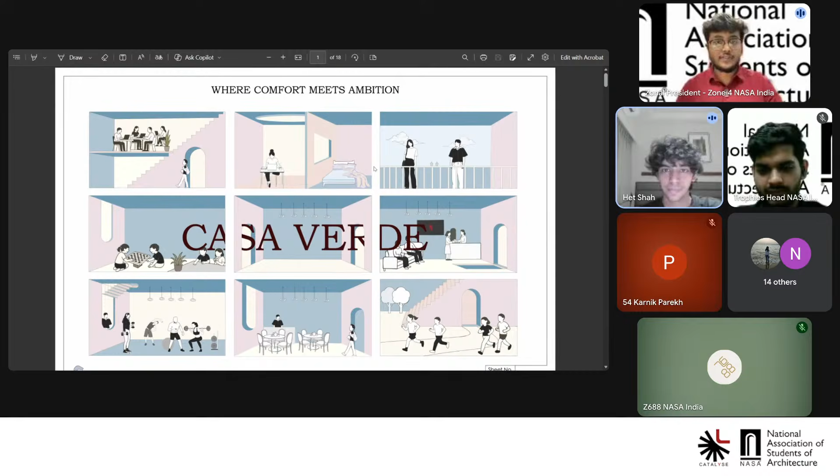Is the screen visible? Yes, the screen is visible. So as Shrestha rightly said, the last brief majorly talked about reimagining urban rental housing, for the evolving lifestyle and the urban migration which has been at its peak.

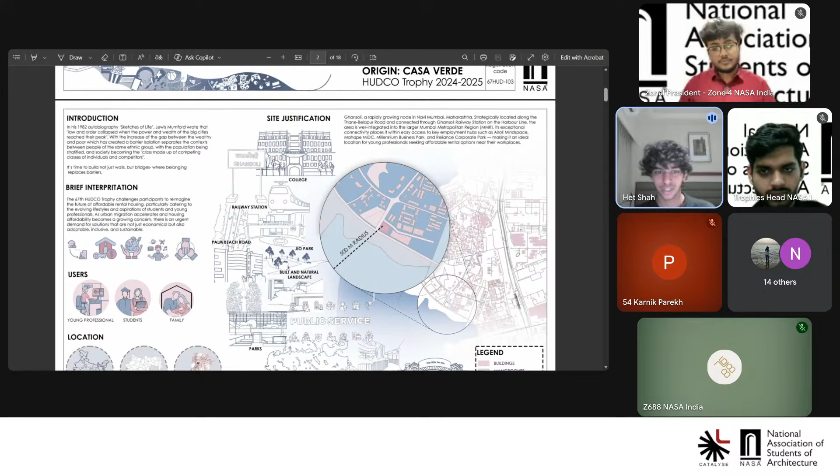Our main focus was on the users, which were the young professionals, the students, and the family members that come with either the students or the young professionals. So our main objective was to identify the site. Our site was at Ghansoli, which was selected because it was near the college, in close proximity to the Jio Park and all the industrial areas, which majorly help with the migration of young professionals or students.

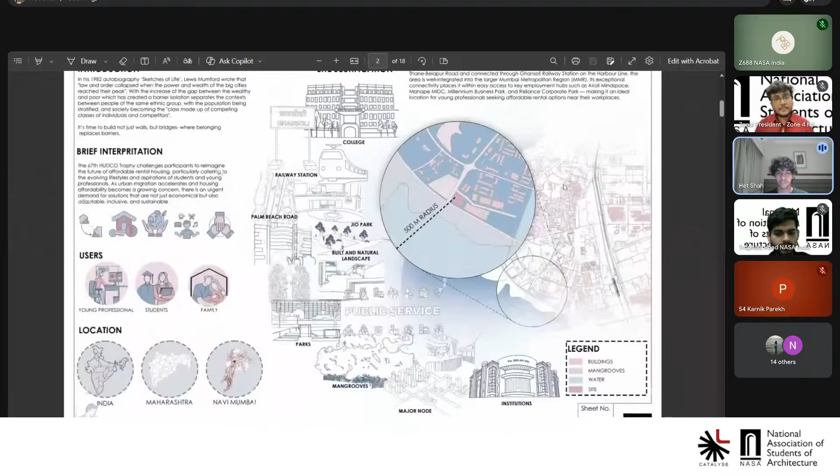After selecting the site, we moved to the SWOT analysis. The work was divided, where a few people were given the task of understanding the government schemes available in the Navi Mumbai region or surrounding areas, which could help reduce cost or assist in rental housing. We also tried to understand the site during different periods of the day - morning, afternoon, and night - and what activities take place there.

After that, we started studying rents in the Navi Mumbai metropolitan region. We identified that rent has ranged from around 19,000 to 20,000 down to 7,000 to 9,000. In Ghansoli specifically, we identified the rent prices for one room kitchen, 1BHK, 2BHK, and dormitory units - the modules asked for in the brief. We differentiated between unfurnished and furnished options, and identified that rent prices have been increasing over the years, but there has not been a drastic change in the salaries of people working in those regions.

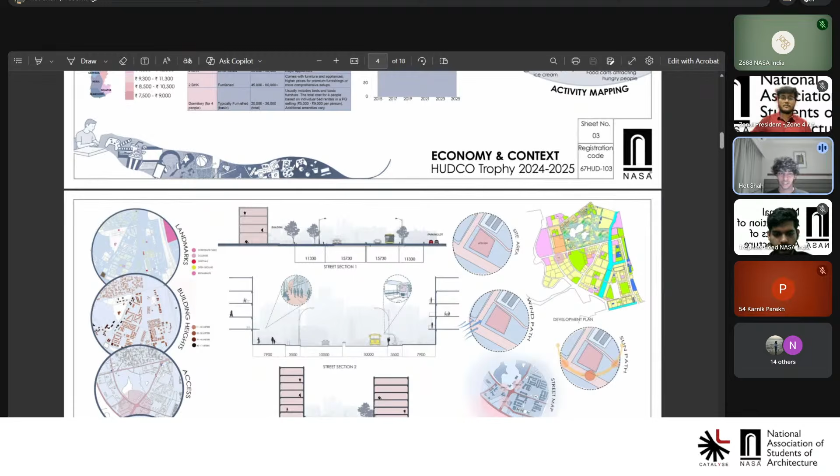After that, we tried to understand the site at a micro and macro level - the land masses, surrounding green spaces, street level, how the buildings, footpaths, and roads work together. We also studied the site area, wind path, and sun path, which helped us in the overall massing and site development of our built mass.

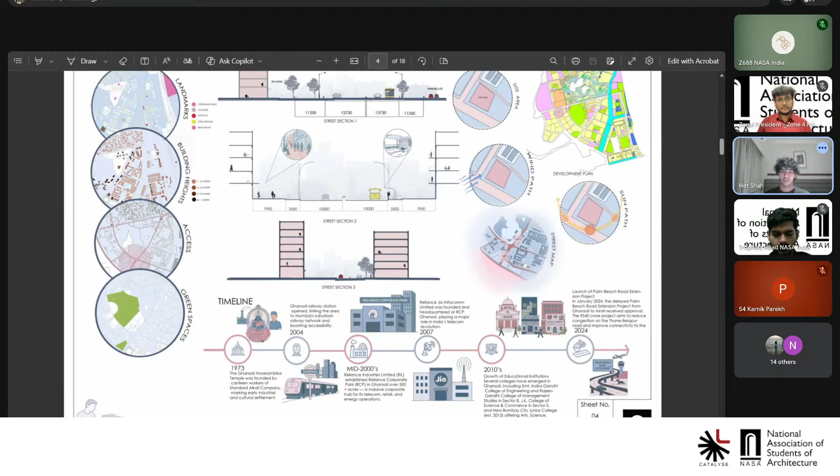We tried to study the timeline of the region, how it developed over the years, right from 1973, when the Navi Mumbai plan was proposed, and after that how the Jio Park helped in evolving the whole region.

After that, we moved to interviews, where we interviewed different stakeholders in the region, from low salary workers to medium and high salary workers, understanding how they have been staying and in what kind of conditions. We also interviewed a few students and landlords who have been providing such rental housing in the region.

Then we jotted down what all their needs were, and what accessibility criteria they look for while looking for rental housing in the region.

After that, we came to the case studies, where we identified a few case studies linked directly to our objective, identifying what materials or planning objectives were taken up by the built mass, what was their unit planning criteria, and what was their overall site context based on.

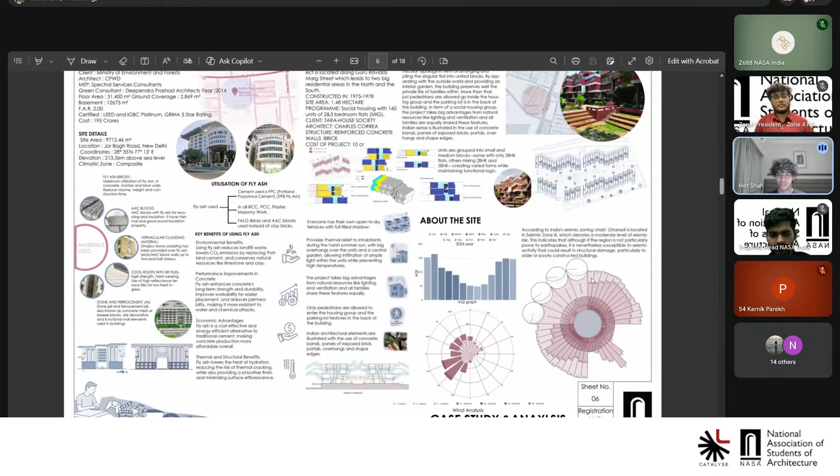After that, we did site analysis using AQI graph, wind analysis, humidity, sun path, etc. This was our main sheet, where we talked about how the building developed over stages.

First was the set out, where the building setbacks had taken place, then the massing, and then our main objectives, which were the passive strategies, including the central courtyard that creates a microclimate.

Then there's the west facade which would require sun blockers. There were double-heighted lounge spaces provided, and open terrace spaces at each floor so that there is a breathable space for the people and it doesn't feel too obstructed.

It was also about how the whole ground floor has taken place, because that's the entry level view that people first see. So there were a few activities provided on the ground floor, which will be explained further.

After that, we also tried to optimize the overall courtyard by keeping the proportions of the courtyard and the building height in proportion, so that the area is shaded throughout the day.

Then we used Grasshopper plugins to understand how sunlight has been affecting the building in different ways, and where there will be a requirement of special treatment.

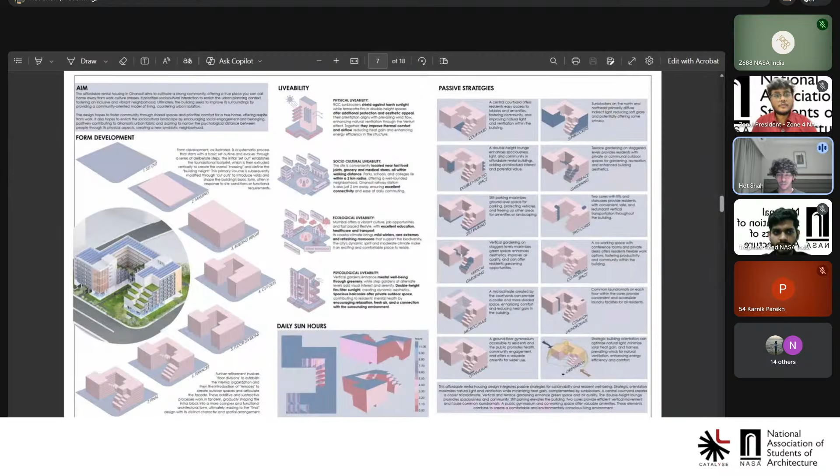Then we identified a few livability criteria such as physical livability, social-cultural livability, and economical livability, thus providing green walls, lawn spaces, or spill-out spaces for the residents so that the overall space can feel much more lively.

After that, I think Shravani, would you like to take off from this? Yes. In the brief, we were asked to design four types of modules: 1 RK, 1 BHK, 2 BHK, and dormitory.

First, we studied the problems faced by people currently living in these spaces. Then, we designed each module in two ways: one for families or couples, and the other for young professionals or students, as the brief included different types of stakeholders.

For the 1 RK, the main problems were less space and storage issues. As shown in plan A, designed for families, we added a partition in the room so one person can work at night while the other sleeps peacefully. We also provided vertical storage like shelves and organizers, along with under-bed storage.

In the same way, we designed the 1 BHK, 2 BHK, and dormitory modules based on the needs and problems of the users. Next sheet.

As you can see in all the plans, we have provided an open kitchen because students and young professionals usually don't use the kitchen very frequently. Instead of giving a separate kitchen and utility area, we used that space to make the bedroom and living room area more spacious. Also, in the plans designed for young professionals and students, we provided two separate toilets since two different students will be living in the unit.

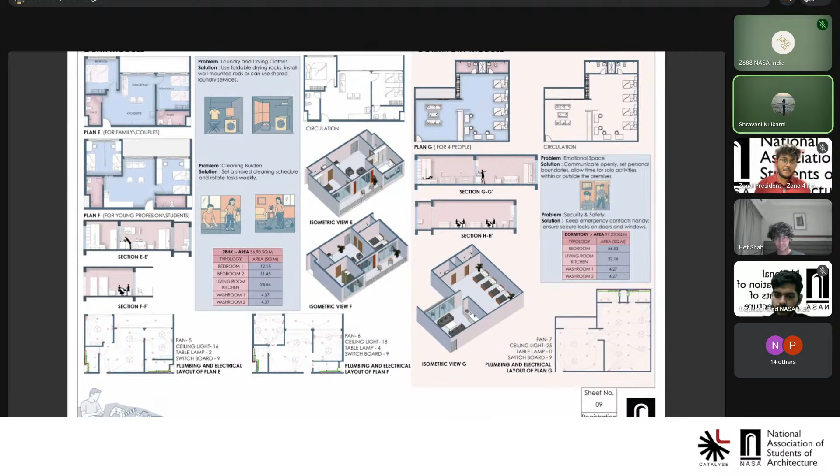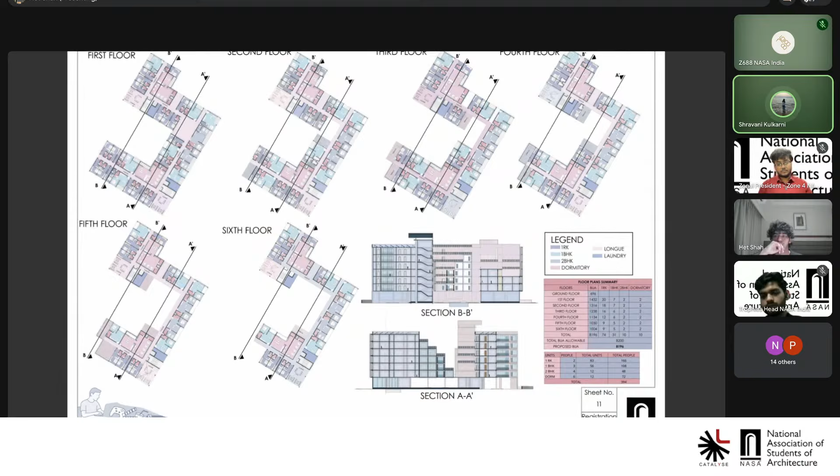In the floor plans, we have provided a lounge space near the lobby and a laundry room on each floor for the convenience of residents. We have also designed a double-loaded corridor to avoid wasting space in circulation areas. As we move to upper floors, the number of units gradually reduces to create open terraces on each level. We have also provided solar panels on the terrace floors.

Next sheet. And these are the views of the building.

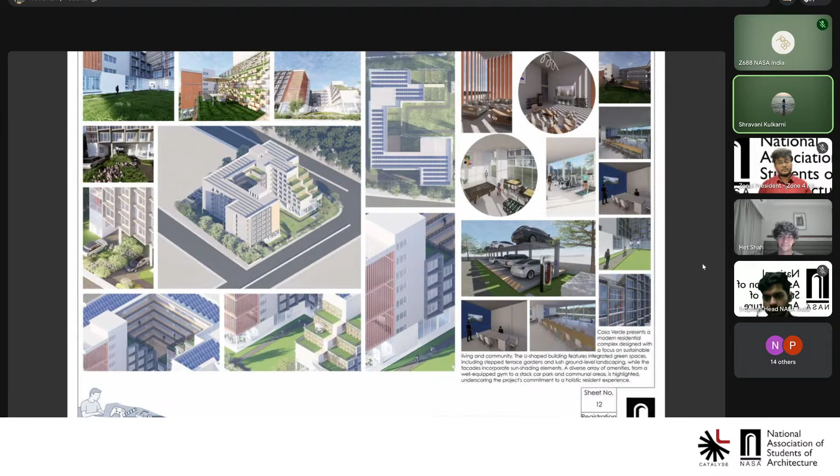Now Het can take over.

So as I rightly said, there were a few areas which were getting harsh sunlight due to them facing towards the south. So we have tried using sun blockers, which are also angled at a certain degree so that there is no obstruction of the view, and the sun is also not that harsh.

Again, we have tried putting some terracotta wall or green wall at spaces to reduce the overall temperature of the building. And yeah...

After that, this is the overall material selection and how we have used low VOC paints or materials which are low cost but also help in reducing the U value of the building.

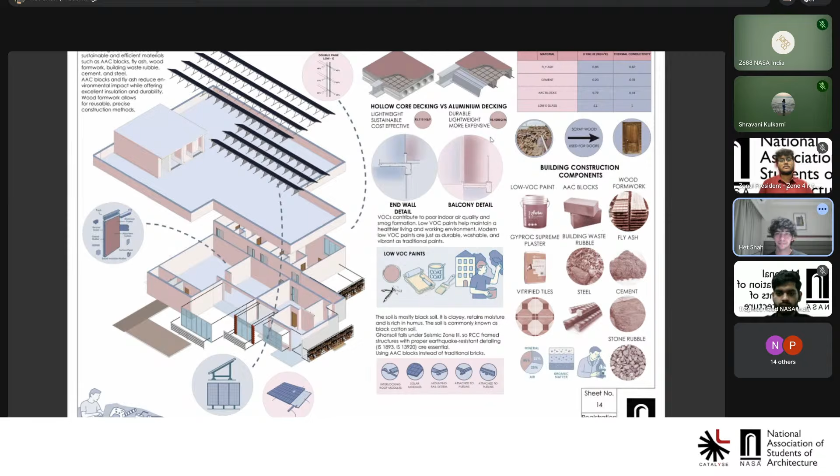Also, we have given a comparison of why we have taken certain methods of construction. For example, the hollow core decking versus the aluminum decking, where we have also shown how much the cost reduction is, and how it is beneficial.

Yeah, and then we tried to get a step closer with building management systems, where we have provided sprinklers and safety CCTV cameras, and how all of them have been integrated into a single system which can be monitored easily.

With that, fire safety has been taken into place with sprinklers at individual distances and smoke detectors, with fire safety norms where the staircase should be at a 30 meter interval.

And then we have also tried providing low flow fixtures and energy efficient appliances, which also help in reducing the overall water consumption, along with the energy use, thus bringing the maintenance cost down.

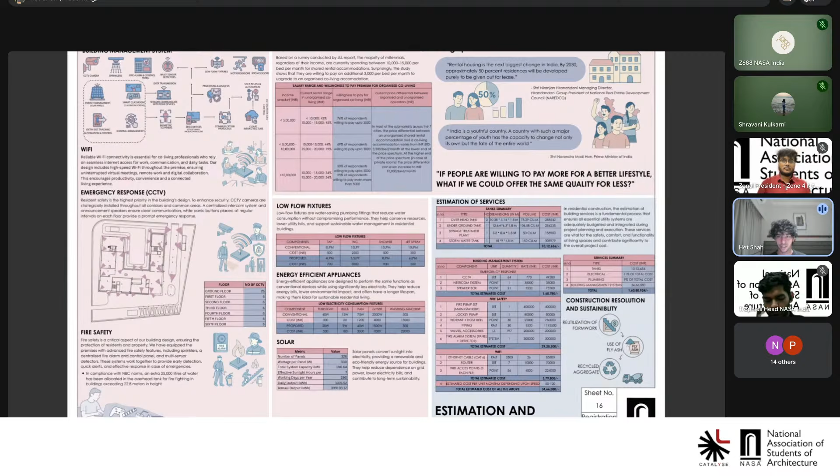And then it was all the estimation of how we have tried to reduce the cost as much as possible, which has been briefly put over here, the overall costing.

And then the final cost that we came to was 7 crore 54 lakhs, 41,222, which was 30 or 35% lesser than the usual cost that was found.

And then we also tried to identify the rent prices that we can provide for the users, which was around 5,000, 12,000, 17,000, in contrast to the existing costs, which were 9,000, 17,000, 25,000, which we identified was again 30% lesser than the cost provided in other buildings.

According to the brief, the design should be sustainable, community inclusive, include innovative technological integration and shared interactive spaces, and be climate responsive. We had to select our site in a tier 1 city, so we chose Kothrud, Pune. It's basically a student area, including IT sector and educational institutes, so we could cater to a large target audience of young youth and students.

We also did the activity mapping and studied about the government schemes. Next sheet.

So this is the site analysis of Pune Kothrud. We did the climate analysis as well, and about the site vicinity, it was near educational institutes. This was the soil analysis and climate analysis. Next.

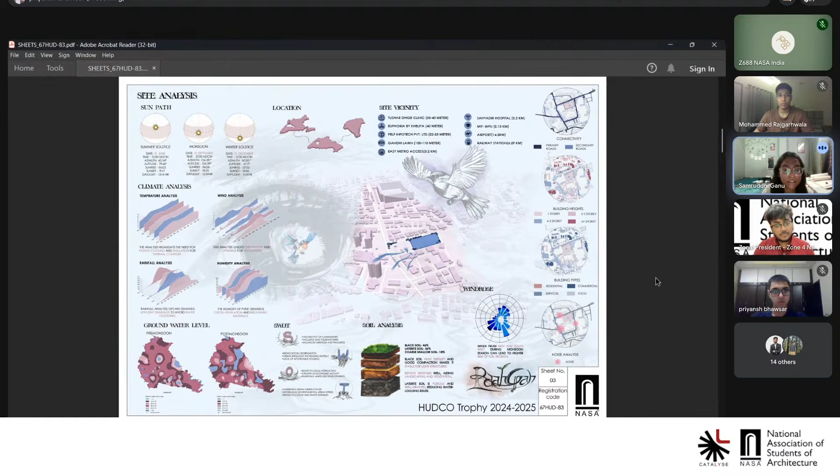We also studied the bylaws interpretation and the massing development. We were given four different typologies: dormitories, 2BHK, 1BHK, and 1RK. So we divided the spaces accordingly.

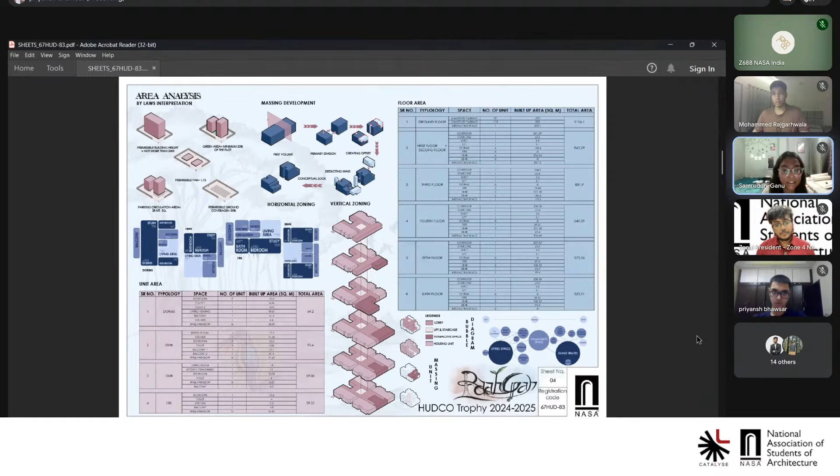And the next is the concept. For the concept, we had a storyline on migrating birds - local migrating birds which were blue robin, kingfisher, and flamingos, and also a local bird. We took them together and showed how migrating birds come and meet up at a banyan tree. The banyan tree shows the place where they rest, which is also our structure, the building that we built. In the concept, we showed how home is not just something you live in permanently - it could be a temporary place where you meet people, grow as a person, and evolve.

Here we also showed how the bird, the blue robin, evolved from an introvert to a bird who could finally bring together everything he had and open up and share it with everyone, and how he could connect and seek opportunities. Also, we studied the sustainable development goals, which helped us know about the requirements and how the government wants things to be done.

Our goal was to construct a low cost maintenance place where students with rental housing needs could afford it, and how everything was affordable to them, how they could live easily. Our design intent was to create everything sustainable.

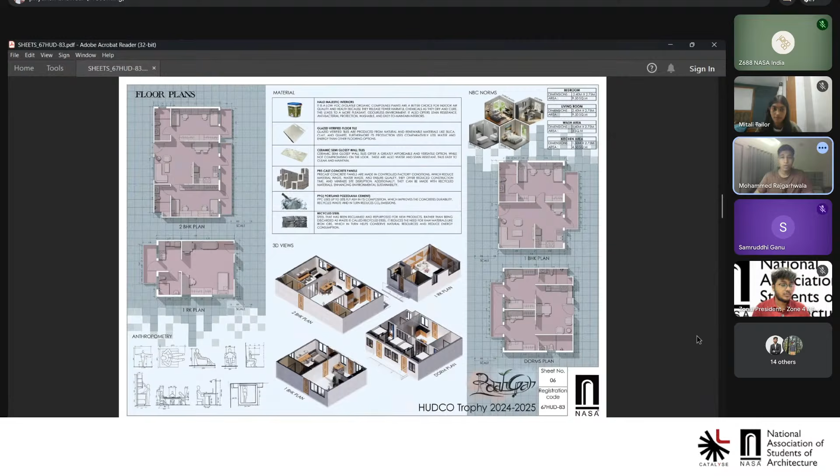Can you go to the next floor plans? So what we did was put one RK beside a 2 BHK, one dormitory next to a 1 BHK, so there could be inclusivity. Someone who has just graduated in a particular field and is senior to someone else could help them out to create inclusivity. If a dormitory is next to a 2 BHK, working professionals in their late 20s could help someone in their early 20s figure things out, even in projects, and they could have real life interaction and experience rather than being isolated. It should be very interactive, and for that we added multiple interaction spaces on each floor, from sports courts like turfs and basketball courts to just spaces to hang out, so you could have inclusivity and community. It was like a banyan tree with a nest of many birds living in harmony, so it was meant to create this harmony.

Can you move to the next slide? These were the renders of each dwelling and all the interaction spaces.

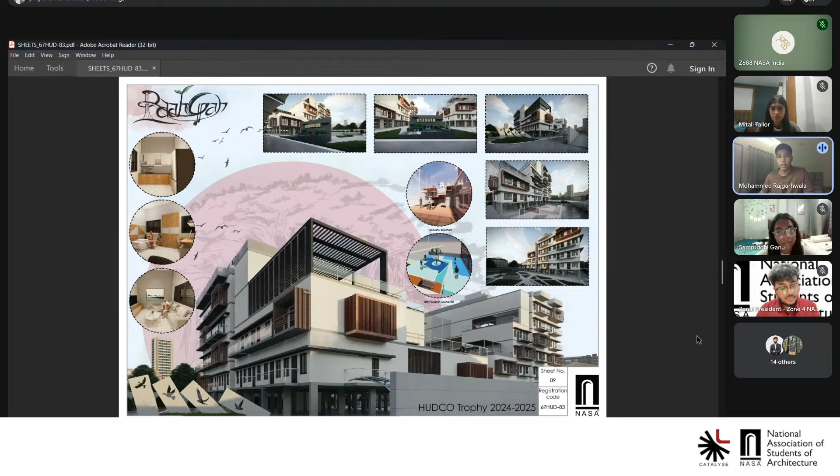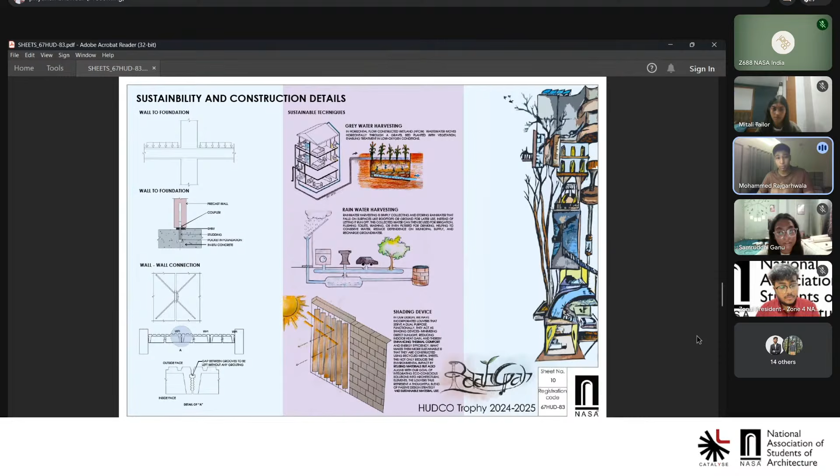These were some sustainability techniques: grey water harvesting, rainwater recharging, and louvers and sunshades were provided to break the harsh Pune sun. Can you move to the next slide?

So this was the life cycle analysis of how sustainable this building was. We tried to use materials that were quite sustainable, and instead of brickwork, we went for precast concrete sheets for the walls, because at one point in their life cycle these were more sustainable than bricks, which were burnt in kilns. It was quicker and easier to assemble than traditional bricks, reducing the time of the project and helping with the cost.

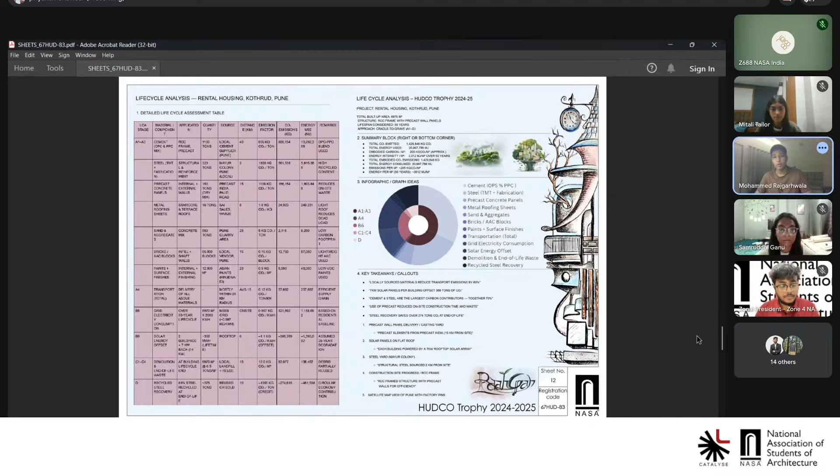Can you move to the next slide? So the conclusion was similar: we wanted inclusivity for everyone. We did not want someone moving from a small town to a tier one city for college to feel it's a big step, to feel alone, not knowing anyone, feeling isolated in a big city when coming from a small town and getting scared. So we wanted to create a community, a space where you feel inclusive, where someone living nearby could be like your sibling, supporting you. So we planned it through architecture so that young students could be partnered up with young working professionals who could help them out in their personal and professional life. That was the basic idea of Hudco.

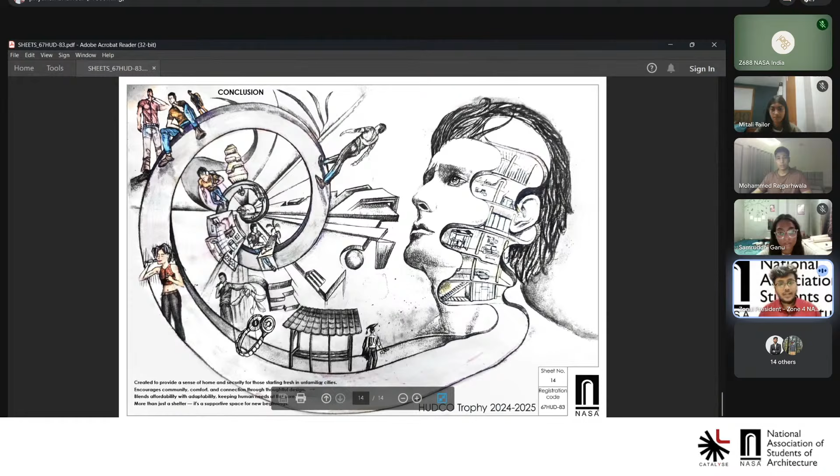Yes, great presentation, Z212. First of all, I really like the name Raahgir that you guys have given. That really makes sense.

First question from my end: we all know that choosing a site is half the battle of winning any trophy. So what were your reasons to choose the site in Pune? How did you guys approach it?

Basically, we were looking for an area that had both working professionals as well as students, in a close 2 to 3 kilometer radius. Kothrud was very accessible to that. It had IT sectors also, and was close to many big colleges.

I'd like to add that if we were to choose a place where there wasn't much of our target audience, it wouldn't make much sense. So we specifically chose Kothrud, Pune, because it's a place where a lot of students and working professionals already live. It would have been easier for them to shift into our project, and more affordable for them. So that made the most sense to us.

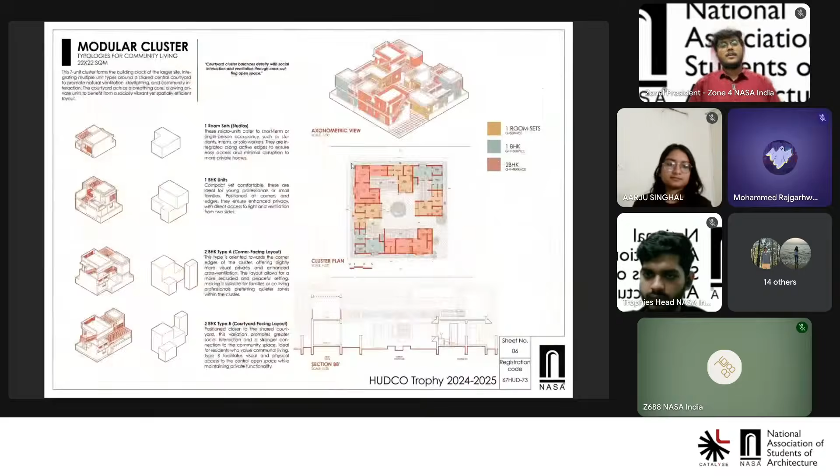Okay, so good evening everyone. First of all, we're extremely honored to represent our college as recipients of the Special Mention Award in the Hudco Trophy. One of the nicest parts of this project was that this was not just a submission project for us, it became a shared experience among our team.

And this project started with a simple question: why does housing in growing societies feel so disconnected from people? While studying housing conditions in Jaipur, we observed issues like rising rents, unsafe living conditions, lack of ventilation, poor shared spaces, and most importantly, the absence of community interaction. This became the starting point of the project.

Our concept, from crisis to community, rethinks affordable rental housing through courtyards, cluster planning, walkability, shared spaces, and climate responsive design as well. So this sheet which you are actually seeing, this was the emotional foundation of our project.

Before starting the design, we first wanted to understand the real condition of urban housing. Instead of beginning with numbers like FAR, density, etc., we began with people. We observed that cities like Jaipur are attracting migrants, young professionals, students, but along with that, the living conditions in these spaces are continuously deteriorating.

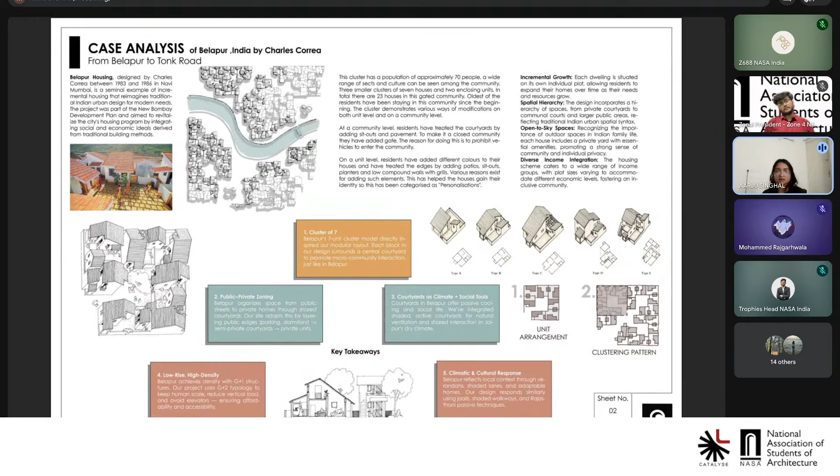Another important aspect was pedestrian prioritization. Vehicular movement was minimized, creating safer spaces and interactive community spaces as well. We extracted principles from this Belapur housing project, and these principles basically became the conceptual part for our design.

So we'll move towards the next sheet, the site analysis. Why we chose this: we chose Tonk Road site in Jaipur because it lies within a rapidly growing urban corridor with increasing rental demand from students, migrants, and young professionals. This site had strong connectivity, nearby institutions, and active urban surroundings.

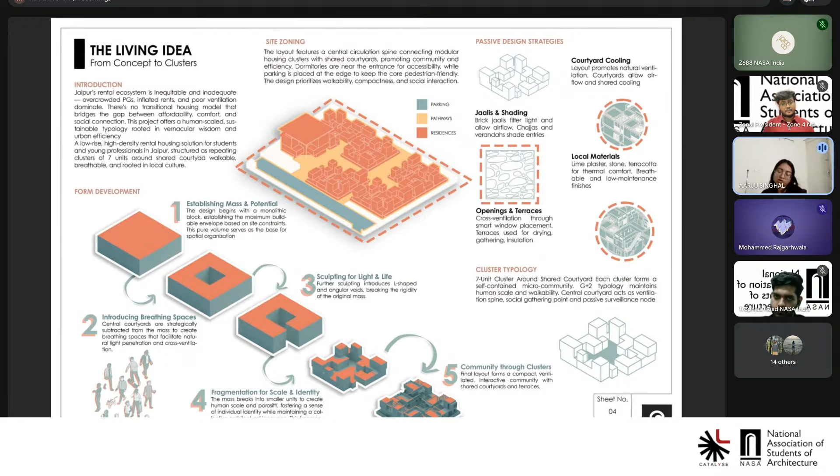The courtyard was again the heart of the project because it worked both socially and climatically, improving ventilation, daylight, thermal comfort, and interaction between residents. Along with this, we also introduced movement corridors, passive cooling strategies, and modular planning systems. Overall, this established the philosophy of the project, because it created housing that balances affordability, sustainability, privacy, and emotional well-being. Moving to the master plan and community living.

This translated our concept into the actual master plan. Instead of designing isolated apartment blocks, we tried to plan the site as interconnected community clusters, and each cluster had its own safety, basically divided into a hierarchy of spaces like public, semi-public, and private areas.

Public functions like dormitories and activity spaces were placed near the entrance, while quieter residential zones were kept inward for better comfort and privacy. The central pedestrian spine became the backbone of the project, and rather than treating circulation as just movement, we designed it with landscape pockets, sitting spaces, pause spaces, and interaction zones. So this sheet focused on how research and concepts were transformed, focusing on dignity in affordable housing.

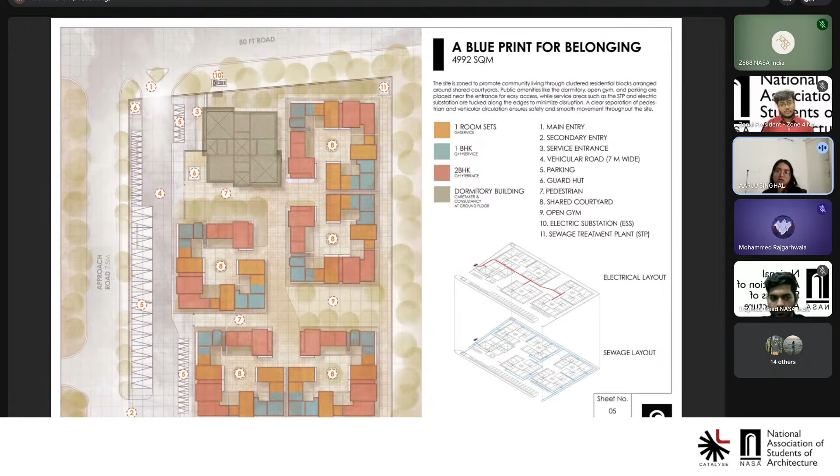So now I'd like Mehak to take over.

One of the clusters consists of 7 units, which includes one RK, one BHK, and two BHK, with two typologies. The one RK that you see is sandwiched between two BHKs and one BHK. It's on the active edges of the cluster. The two BHKs are at the corners, and the one BHK is also at the vertical corners. So in the center, you get a central courtyard.

Then we can go to the one BHK. One BHK is a duplex. We went for vertical stacking rather than horizontal stacking because one of our major concerns was passive cooling and daylight accessibility to all spaces, which I think we achieved here because of the central courtyard and the vertical stacking that we did.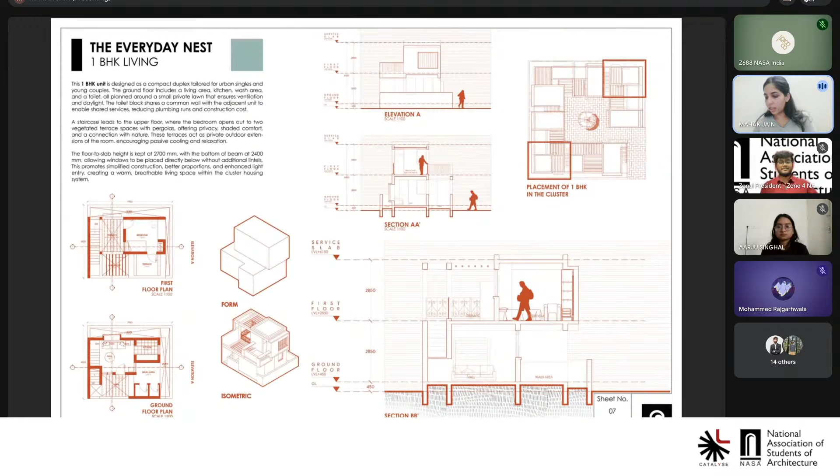The one BHK we also designed very compactly, trying to have a minimal footprint. It includes one bedroom, a single kitchen, and a wash area. For all the spaces, we tried to give a spillover of a lawn-like area so that they have visual appeal in such a dense cluster, and it also creates a microclimate change within the cluster.

Two BHK, type A: on the ground floor, it has a living area, one bedroom, kitchen, and wet area. On the first floor, there is one more bedroom which opens into an open terrace.

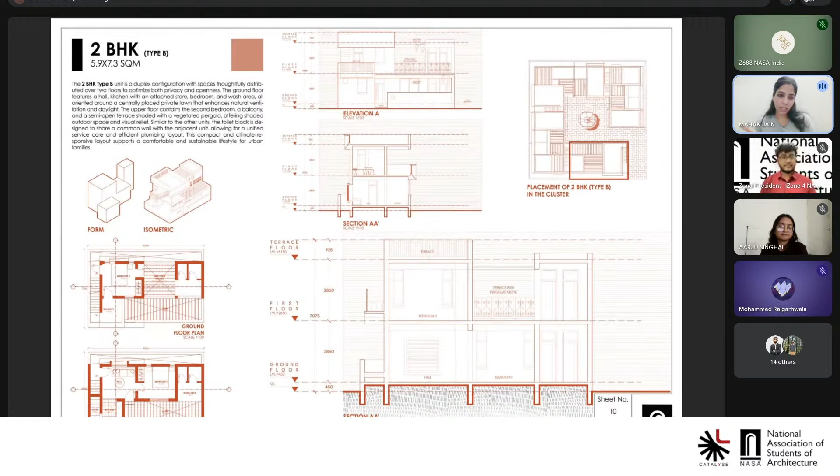Similarly for the other 2 BHK, it's just a different planning but a similar concept: living area, bedrooms, and kitchen on the ground floor, and one bedroom on the upper floor.

So next to the dormitories, we designed it in a very stepped section, as you can see, which helps us create these common areas, like this OAT kind of space here, which creates a double heighted space for community gathering and social interactions.

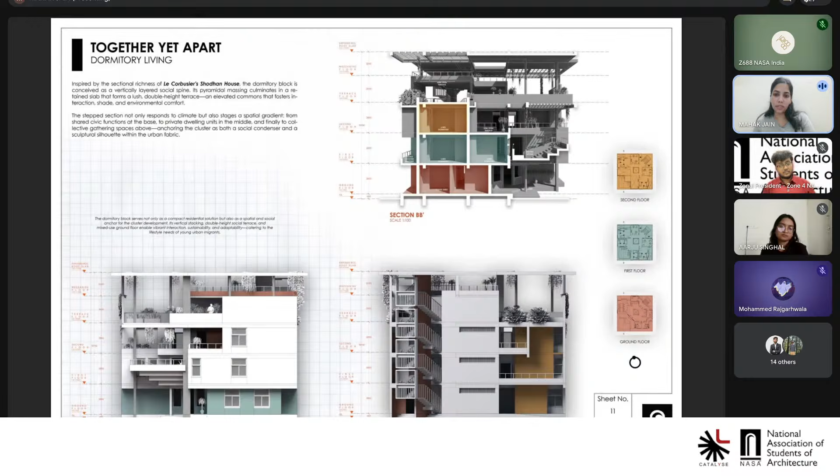In plan you can see it's a stepped section. On the ground floor we have all the civic functions like offices, kitchens, mess. On the first floor we have the dorm rooms and one open OAT, which is double-height for social interaction and gathering. On the second floor, again we have rooms and a common space.

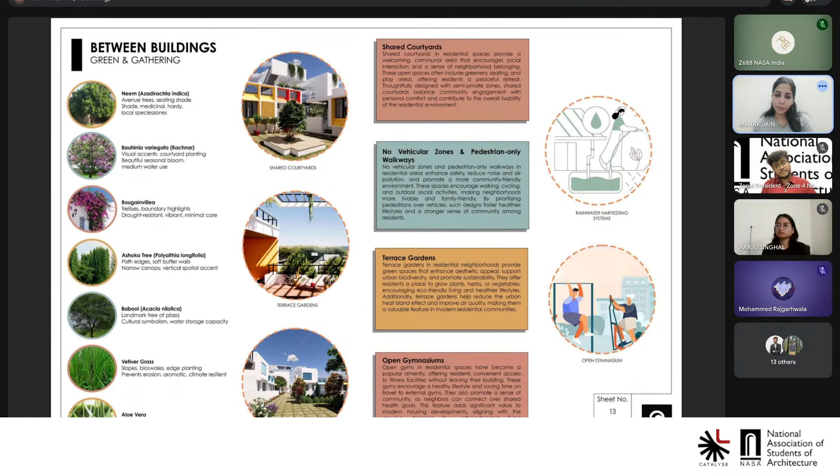Around the walkway, as we already discussed, and then the terrace gardens that we created on the first floors of the units, and an open gymnasium we have given. The sheet overall explains how the day went and how humans interact with the design.

The shared courtyard can be used in so many ways, like morning walks, community gatherings, and some events if they want to have them. The terraces can also be used for yoga or day-to-day activities like drying clothes and other things.

I think I can also take over now. So along with the activities we planned, one more important thing that always comes with the design is the green logic. We wanted sustainability to become a part of this planning rather than an add-on feature.

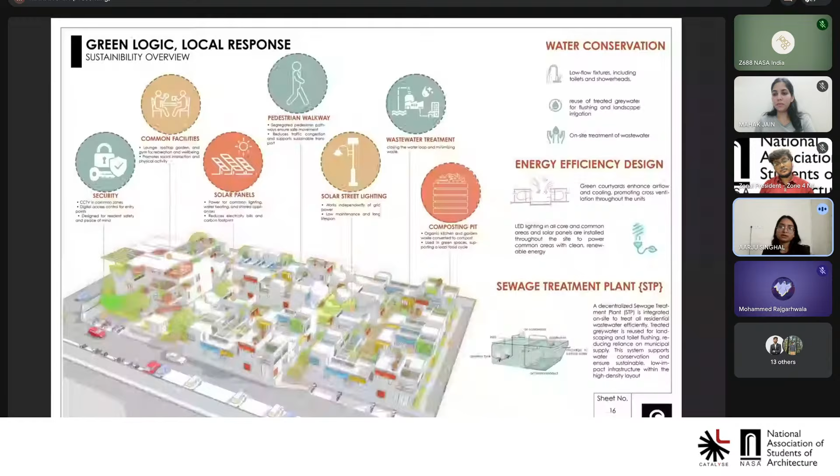So that it became low cost and functional, I want to add one thing - rather than giving fixed windows and glasses, we have given louvers, because of the climate of Jaipur we wanted passive cooling. We have given courtyards for cross ventilation to work, and the louvers are the best option there.

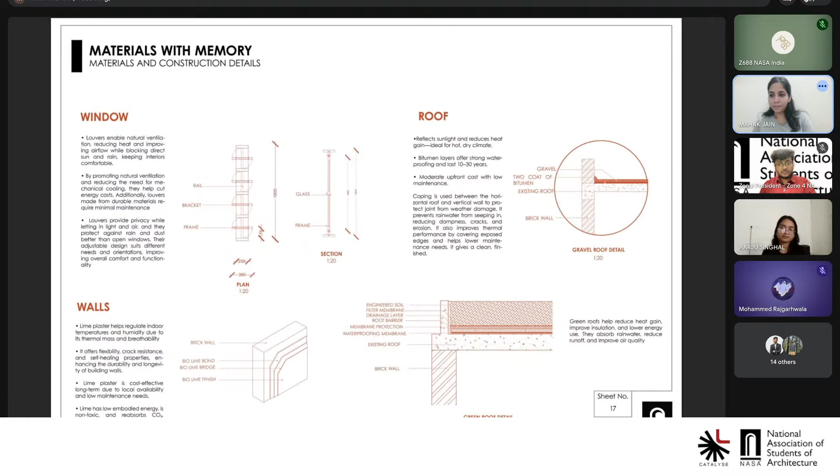The overall cost for us was reduced by the lintel beam that I already discussed, and also all the wet areas, the toilets given, share common walls with the adjacent unit. So all the plumbing lines and electrical lines can be shared, and the overall cost has been reduced because of that.

These were the snapshots, like the 3D views and all. So in the end, this project became much more than a competition entry for us. As I told earlier, it became a learning process about people, cities, and the emotional role of architecture in everyday life.

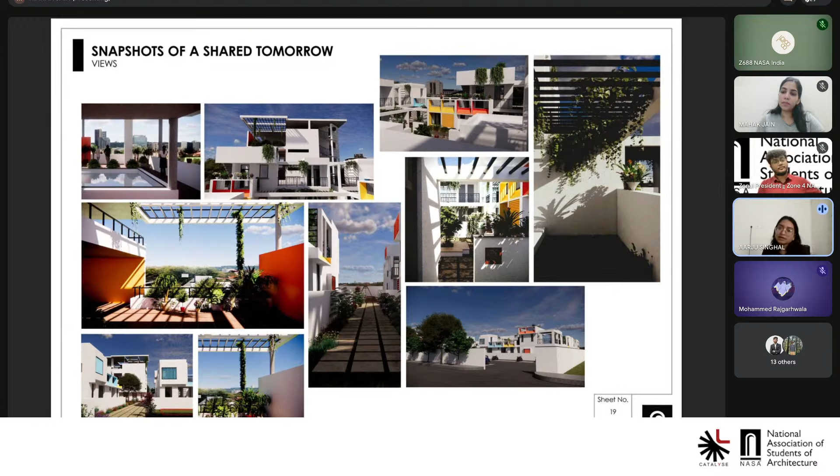We also named this project Anvaya Enclave, because the word Anvaya represents connection, continuity, and togetherness - the values that became the foundation of our proposal. Through these courtyards, clusters, and walkable streets, we attempted to create not just housing but a connected community where people feel safe, comfortable, and emotionally included. Thank you so much for giving us this opportunity.

Very wonderful presentation and design as well. So, seeing the presentation, I have two questions in my mind. What software did you use for your visual presentation?

That is mostly because we didn't have much proper renders, so mostly it was Photoshop, Illustrator, and SketchUp that we used. And second, what was the biggest learning or takeaway from participating in this trophy?

I think the biggest learning we had was to never take this competition entry as just a submission. Make it an experience with the team, because most of our major work happened after college hours, in the studios, after regular classes ended.

We would sit together for long hours discussing, sketching concepts, debating planning approaches, and figuring out what the project actually wanted to say. There was pressure of deadlines, but it was also fun because everyone was equally involved and invested. The major recommendation given to us from Hudco was not to begin directly from form making or aesthetics.

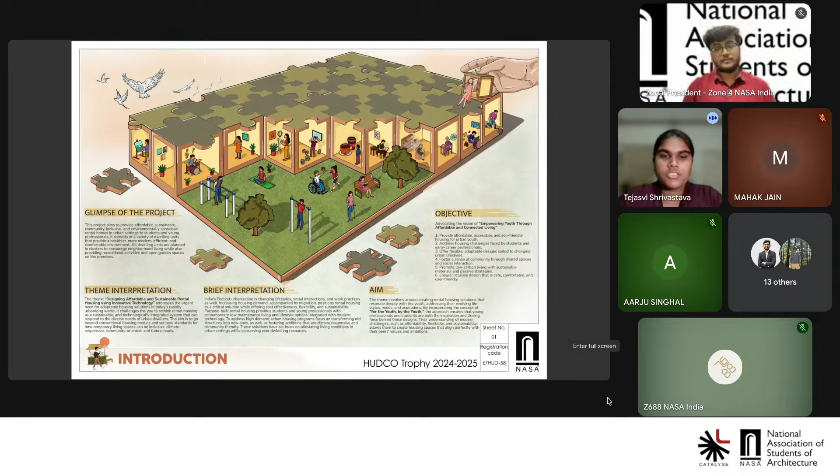Thank you. So the first thing we did was interpret the brief. We understood what the brief was asking. The main thing we understood was the sustainable rental housing we were supposed to design. Starting with it, we tried searching for sites, which was one of the main challenges we faced.

We searched for different places like Pune, Hyderabad, Bangalore, many places. Finally, we found a site in Hyderabad which supported all the aspects of the brief. We found a land piece where proximity was an add-on. This was the first sheet showing what the brief was asking for, the brief interpretation, and the aim.

Also, on the left side below, we gave a small footer representing a basic emotion we wanted to convey - how when a student or young professional goes to a new city to explore and learn, we explore the city as well, roaming into different places, which was a very emotional aspect we wanted to show.

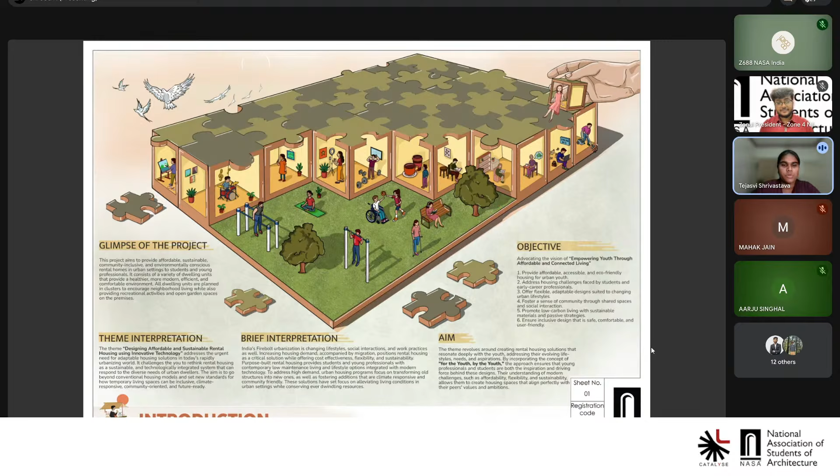Going to the second sheet, which shows why we chose Hyderabad - because of the proximity, there were many institutional buildings. IIIT Hyderabad was there, along with many other high-tech buildings and companies catering to young professionals. This was the main strength of the site. Also, Hyderabad had the highest migrating population of young professionals and students, which we wanted to cater to. Therefore, Hyderabad was the city we thought would be best for this brief.

We understood that Hyderabad's main problem was the climate, since it's a place with harsh climate - that was the main challenge we faced. Then going to the third sheet, talking about site selection criteria, which we already explained, we also studied the problems faced by young professionals. For example, we studied how safety was a major issue, because when young students go there, safety is the prior concern.

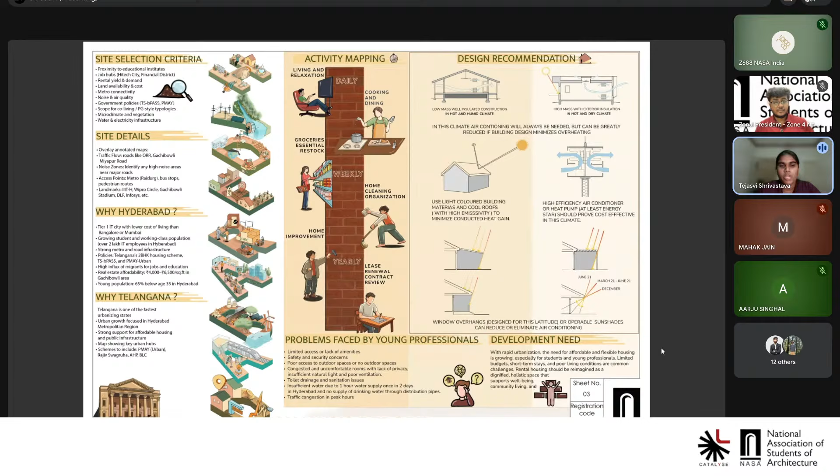The harsh climate, we wanted to provide thermal insulation in our building. We also studied activity mapping, the routine of the people, so we could provide our amenities and facilities according to the daily flow of people's lives. We also studied design recommendations from climate consultants, so we could get some idea about how to cater to the climate of that particular place, and what structural or design elements we could provide. Then moving forward, we had done a few case studies.

The first one was Sheikh Sarai, New Delhi by Raj Rewal. The design concept was the main thing we took from this, because we can see they had made a design that wasn't only aesthetically pleasing. It focused on how simplicity can make things better when we focus on more technical aspects, because using local materials they reduced the carbon footprint, and by using materials like acid bricks and rough cast plaster, they focused on making the building more thermally insulated using natural materials.

That was a very good part of this. Then we moved to Stanza Living, which focused on user centric design. We learned how, in this design, the main aspect was inclusivity - how they make designs, how they provided spaces where people could come together, interact and learn from each other, making it comfortable for everyone so people would come there.

Then the third was Aranya Housing, Indore by B.V. Doshi. This is one of the most notable buildings where we could see organic designs, where there's no rigid system. The main thing is they had made the buildings in a way so that it could be more future ready, so that it could expand in the future and people could adjust according to their needs, which was also a very good point we tried to include in our site.

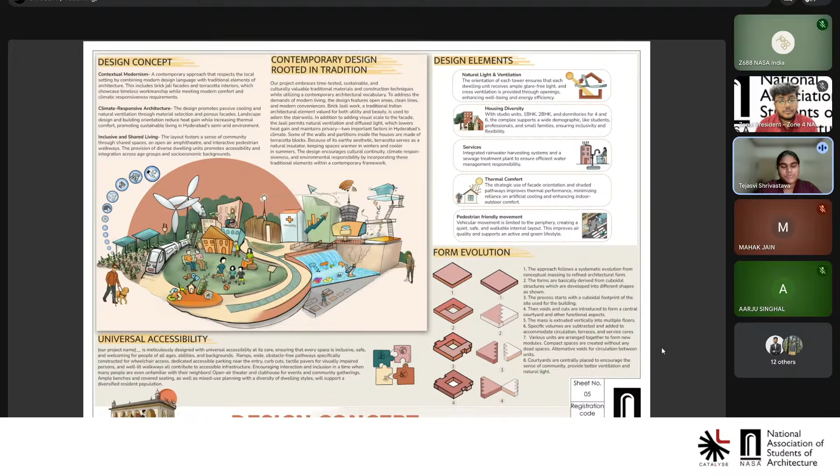We also focused on making the site universally accessible by providing pathways and such elements to support these communities as well. Then moving forward, talking about the master plan - we had provided one main entrance and exit, and also the main vehicular pathways around the boundary of our site, which was a very important circulation element, because we didn't want vehicular movement inside the site. So we kept the pedestrian and vehicular paths separate.

Also, we have provided the clubhouse in the central area, so that it could be accessible from the three different buildings provided for housing. We tried creating a space that could be more fulfilling and make you feel more comfortable with green aspects, providing landscaping in a way that you could feel comfortable walking around and take a break from your tedious lifestyle. So yeah, that's it.

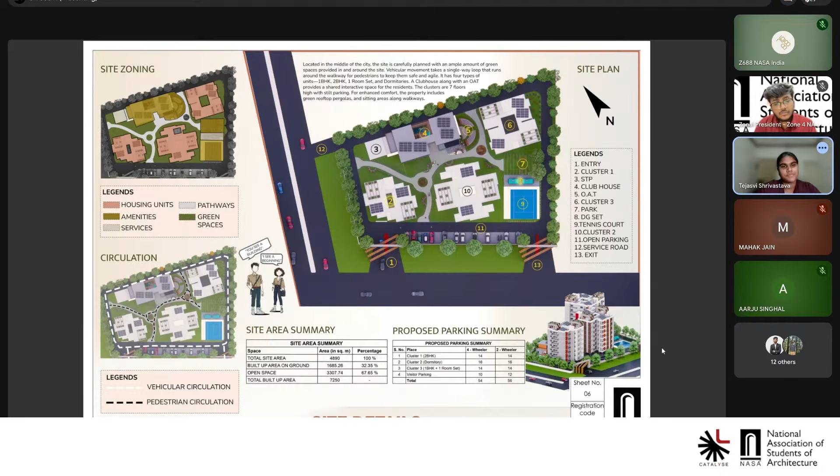So we tried to club the type C and the 1 BHK unit together in a cluster, and the other units were clubbed together. Next was type D unit, which is a dormitory.

So we provided 2 modules. First one was a 4-bed module, and the other was a 6-bed module. The dormitories had a pantry area also, so that students can prepare basic food, or they can sit and enjoy the food in the balcony.

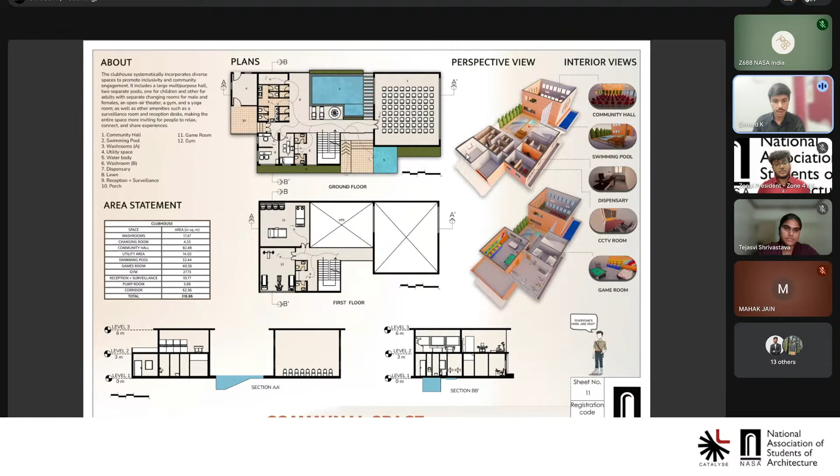Next, the clubhouse, which Tejasvi was talking about. We had gymnasium spaces, play areas, community gathering hall, swimming pool. A dispensary was also included. The surveillance room was equipped here, and all the activities were planned in a way that everyone can access it properly.

And next was circular economy. We did a case study of Taiwan's housing, where they recycled elements from other housing and reused the materials in a way that doesn't harm the environment.

Next was the eco pond, where microorganisms and plants naturally filter the grey water, and the landscaping was done in a way that these eco ponds are built into it.

When it comes to structure and construction detail, we chose a raft foundation, which was ideal for this type of construction. Instead of traditional brick and RCC structure, we went for EPS core panels for walls and hollow core slabs for roofs. The joinery was explained here in a detailed manner.

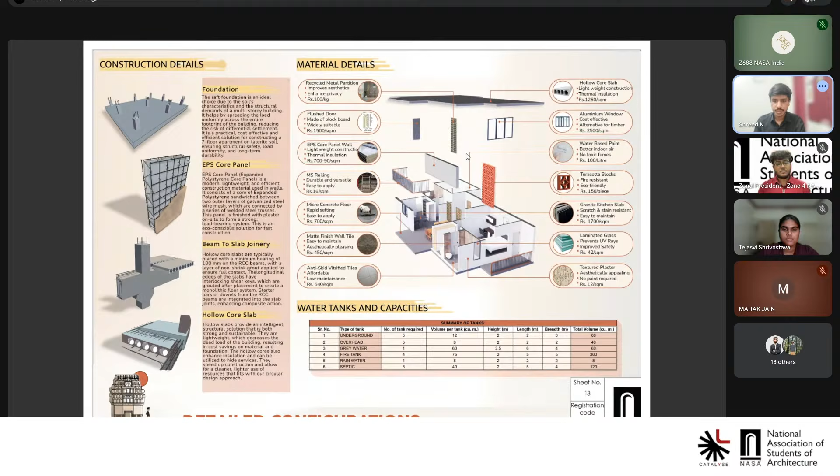Most of the materials were recycled and chosen in a way that they are cost effective and easy to maintain, and easily available in local areas, as well as not requiring specialized maintenance, so that people living there on a rental basis can maintain it easily and live peacefully.

The water tanks and capacities were also mentioned, how many water tanks and septic tanks the place had and what capacity they had.

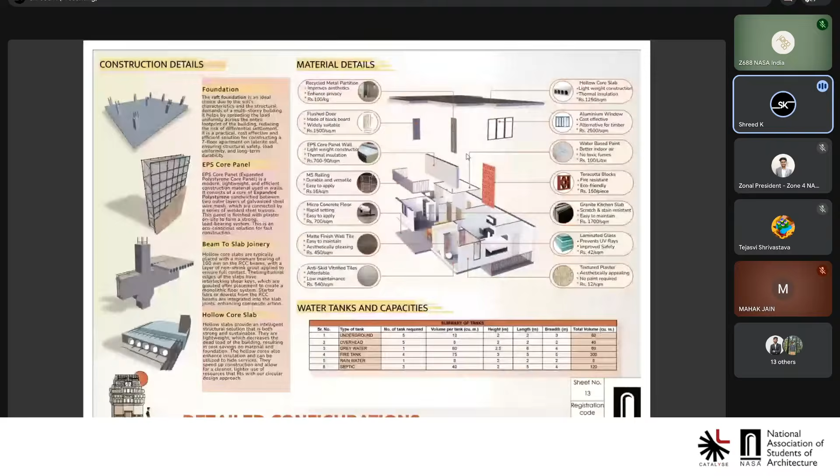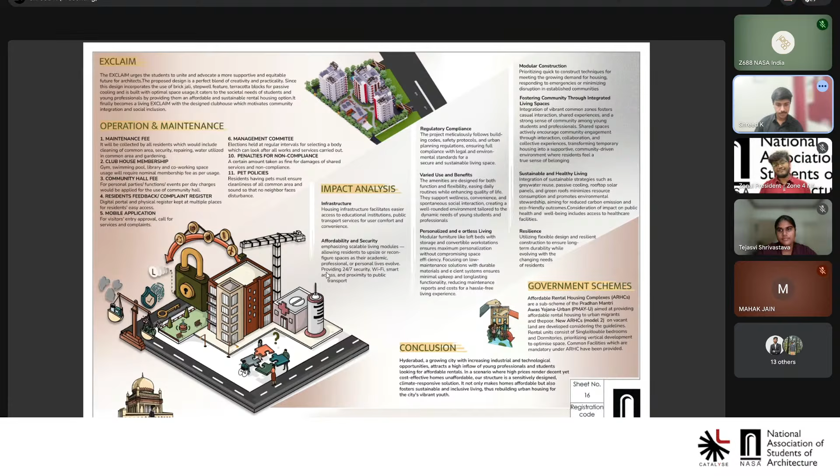Coming to this, I would like to ask you one question. The Hudco Trophy is always a teamwork trophy, and that year's Hudco brief was notoriously research heavy. So how did your team divide the labor between the technical report and the design sheet to ensure both outcomes were equally strong?

So we divided the team into different verticals from the start of the trophy. We had a research and design vertical working together, and presentation was a different vertical. Majorly the second years and first years worked in the presentation vertical, while some second years and third years worked in the research and design verticals. So the technicalities were taken care of by the seniors, and the presentation part by the juniors.

Okay, yes. So were there any drawbacks or challenges faced during this whole process?

Yes, the Hudco Trophy collided with our exams, followed by the end sem break and an event in our college, so we faced a lot of difficulties during those. We somehow managed time. Half the work was done in college in offline mode, then we shifted to online mode while everyone was traveling, so there was a lot of chaos. We lost around 20-25 days in all those things. There were problems with initial designing, and when it came to choosing materials, since only one team member was from the Hyderabad region, getting information on locally available materials was a challenge. But somehow we figured it out and did this.

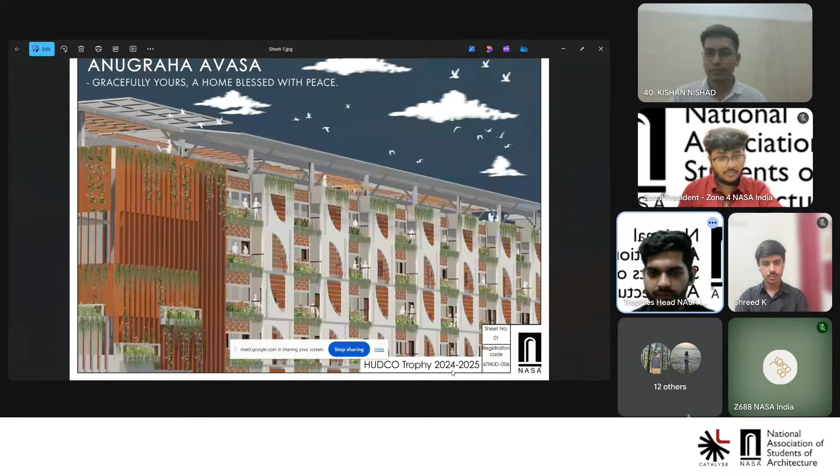Hello everyone, myself Kishan Nishad, and my partner Karnik Parekh is going to explain our entry, Anugraha Avasa.

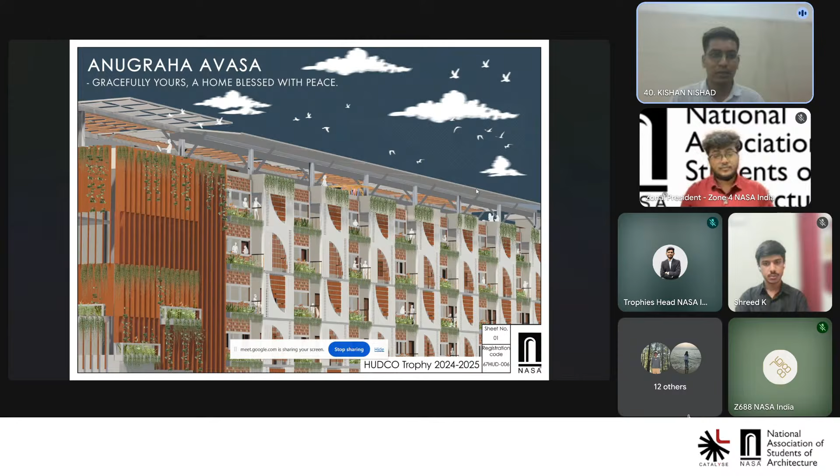To start with the overall debriefing, we tried to debrief all the pointers mentioned throughout the brief and started analyzing all the tier one cities that are falling under it. While doing the analysis, we found that Bangalore was a major corporate and educational hub with impressive growth compared to other cities. But due to this growth, they had a lot of crises, including a steep 30% rise in rentals, and a severe lack of affordable high quality housing for migrants who make up 60% of the student population. In detail, we identified South Bangalore, specifically the Electronic City area, as our focus, as it represents 35% of the city's rental demand but suffers from high cost and low quality facilities.

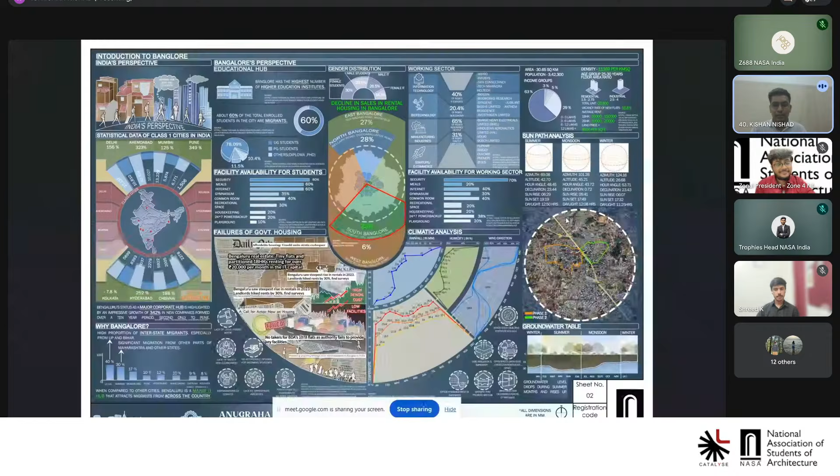Transitioning to the next site, our site was strategically located at a place where all the major transit corridors and IT hubs were nearby. We did rigorous technical analysis, which showed that the southern and western portions have the highest heat gain. This informed our use of shading devices and thermal mass. We also saw that southwest winds could be leveraged for natural ventilation. We mapped everything from building heights and age to traffic density and local drainage. This micro view ensured our design respects the existing urban fabric while solving its shortcomings.

Next, we had detailed human activity mapping for students and working professionals, which helped us find the spaces they use in common. So our approach was rooted in activity mapping.

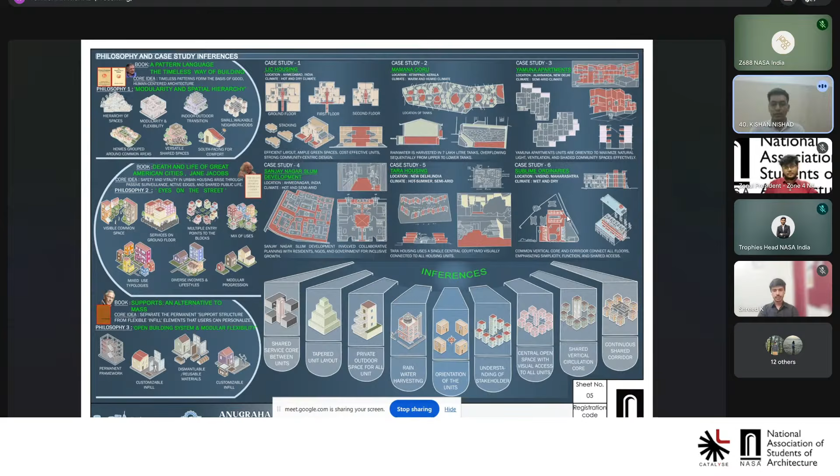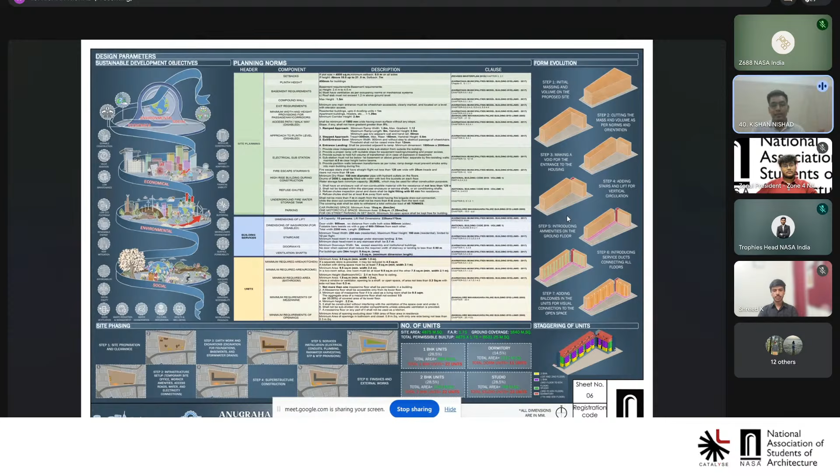The building wasn't arbitrary. We started with the maximum site volume and carved it based on solar orientation, added a central void for an entrance, and introduced staggered units with balconies to ensure every resident had a visual connection to open space. Every inch adheres to Karnataka municipal building bylaws, from FAR to fire tender clearances and setback requirements.

Coming to the master plan, it prioritizes human experience. Only 35% of the site was built, and the rest was left for a lush central park, pet-friendly areas, and community zones like a gym and daycare.

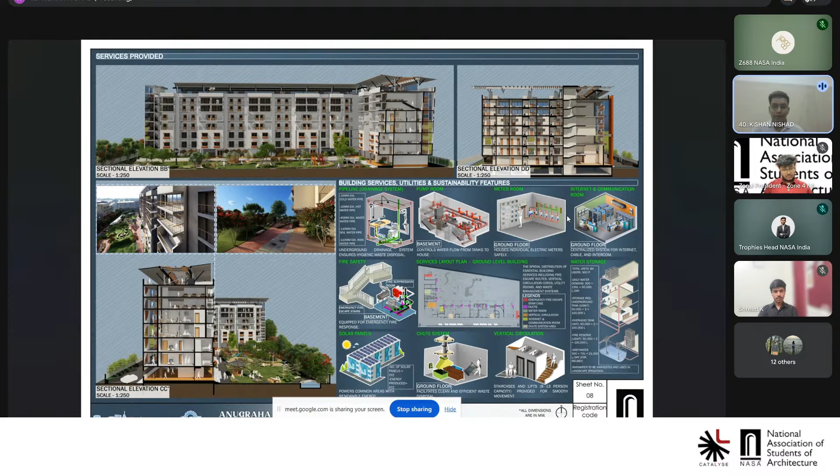We integrated sustainable features for water, including a 7 lakh liter rainwater harvesting system and grey water recycling for landscaping across the site. The entire roof is covered with solar panels, powering common areas with renewable energy. Centralized services handle everything from high-speed internet to automated waste chutes.

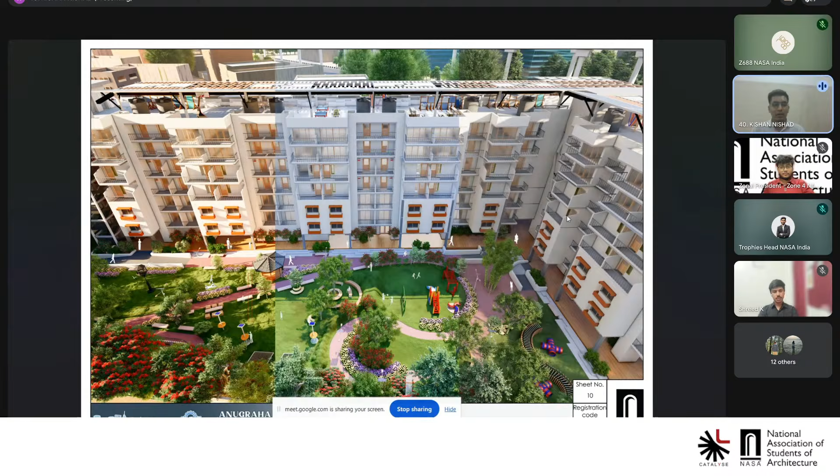Coming to this aerial view, we tried to connect each unit to the heart of the housing, which is this landscape. So every unit has a visual connection with this space.

Next, I would like Karnik to carry on. Thank you, Kishan. So in this sheet, after having an overview of how the building works with its stakeholders and its landscape, we see how the building works as a structure, as a machine.

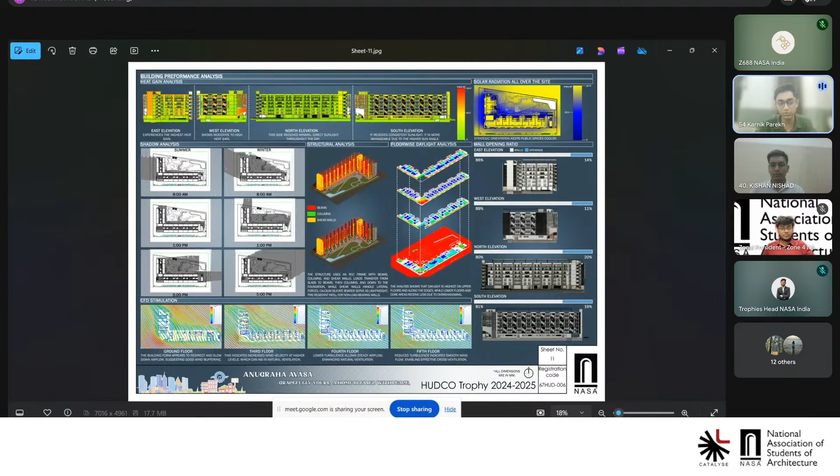We have different computational performance analyses: heat gain analysis, solar radiation, shadow, structural, and floor-wise daylight analysis, CFD for wind approaching each level. Similarly, we have the wall opening ratios for each north, east, west, and south side, showing what percentage of the wall is solid versus how porous the building is acting.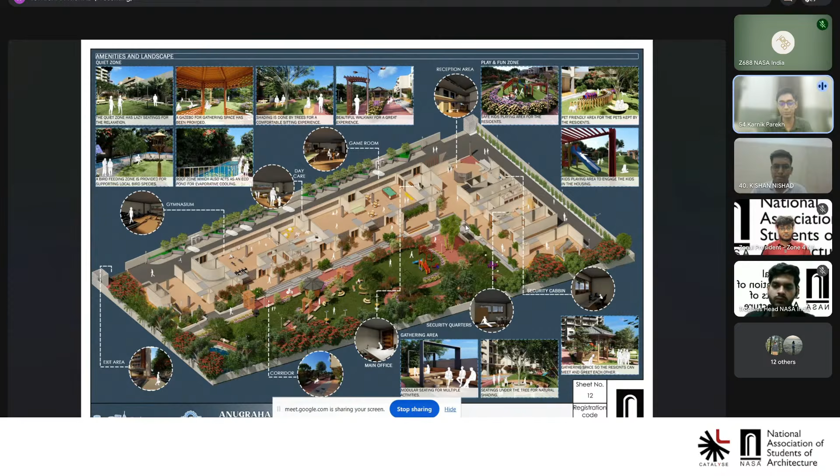Similar working electrical plans and layouts are given for the fixtures, costing, and all. The next.

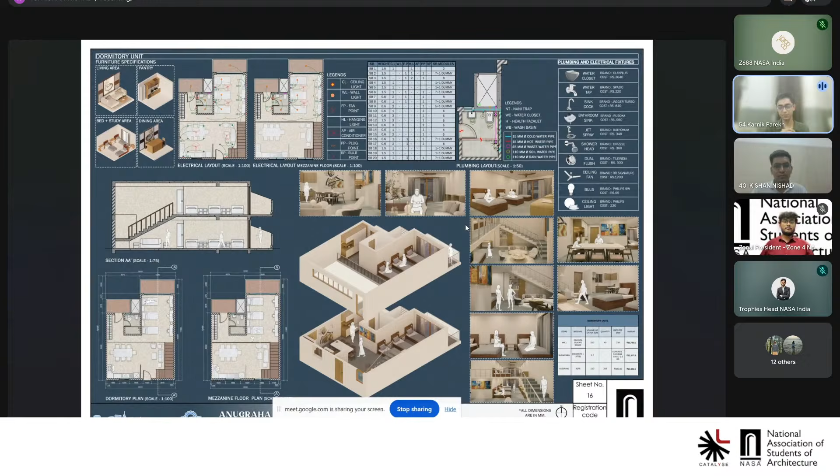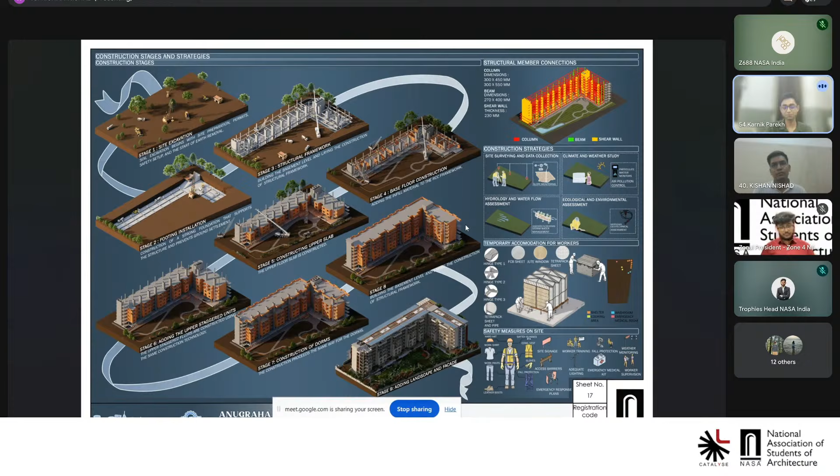We have also provided pre-construction strategies such as site survey and data collection, climate and weather study, hydrology assessments, and worker welfare temporary accommodations designed using FCB sheets, jute windows, and tetra systems used as modules. Next part of the trophy.

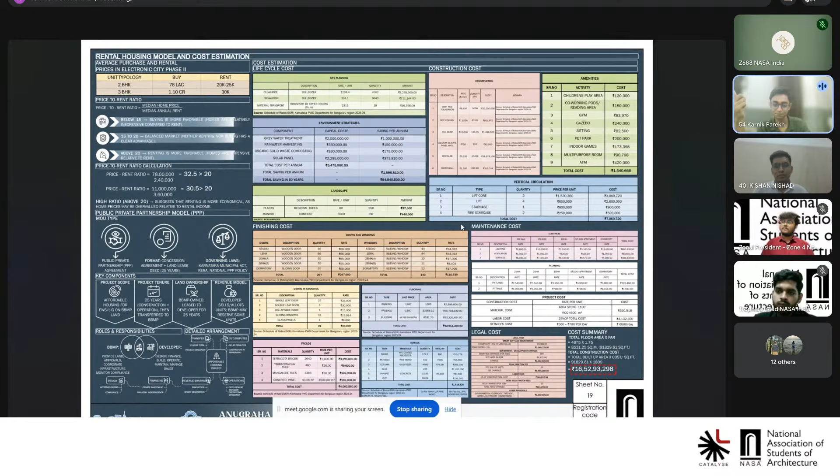The next sheet is showing the final render, the final sheet. It sums up how the analysis, data, and engineering all come together to serve as a single existing part of life. It shows the difference between costly and expensive.

We have listed down all the rental and costing of the final units with the area marked in them, and also ticked down the GRIHA evaluation criteria to serve as a net zero building. So this is not just a part of construction or adding place for communities, it also acts as a net zero building, a communal space, and a quiet, better paid part of living for such communal or working class people.

Yes, this is it. Thank you.

Great presentation, guys. First of all, I would like to say that you guys have worked upon so much graphics and statistics. So what are the softwares that you guys have used mainly?

We basically use Photoshop, AutoCAD, and SketchUp, and for analysis we use Revit and sometimes Rhino. We also have a lot of skill based in Photoshop and Illustrator to form graphics and other renders for it.

Thank you. Hello everyone, we are a team of 4 and 3 are presenting. Today we are presenting our project titled Arohana, Affordable Renting Housing for Pune Youth. The word Arohana means growth, progress and rising upwards, and our project represents a supportive living environment that helps students and young professionals build a better future.

Pune is one of the major educational and IT hubs. Every year, thousands of students and working professionals move to the city for education and employment opportunities, and because of this, affordable and comfortable housing has become a major challenge. Our project focuses on solving this by creating a rental housing community that is affordable, safe, functional, and socially engaging.

The project is located near Pashan, Pune, with a site area of approximately 3,920 square meters. Currently the site is mostly undeveloped and filled with trees and vegetation. The surrounding areas include educational institutions, IT parks, and residential neighborhoods, making it an ideal location for youth housing. The target users are students, young professionals, and working individuals. Our main goals are to provide affordable renting housing, comfortable living spaces, community interactions, access to essential amenities, and a healthy, sustainable environment. Now I'd like to hand over to Amarjith.

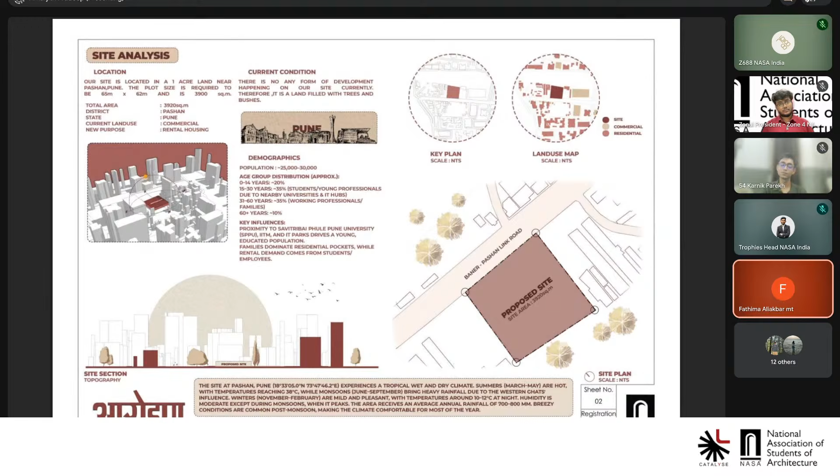Good evening. During our design process, we came to a conclusion on a design program of what all rooms and things needed to be achieved as per the brief. So we incorporated one-room studio apartments, 1BHK, 2BHK, and 4-bed dormitory.

During our design process we started with form development, beginning with a basic cube. In stage one we formed a linear fragmentation, where the design is mainly focused on a linear piece so that wind circulation and movement will be much more efficient. In the next stage, we incorporated an internal courtyard formation for lighting and ventilation.

In the initial stage we came to the area statement: the studio apartments have an area of around 15 to 20 square meters with approximately 60 units; the 1BHK units are 30 to 40 square meters with approximately 50 units; the 2BHK units are 50 to 60 square meters with 20 units; and the 4-bed dormitory is around 25 to 30 square meters with 10 units.

And I hand over to Almas.

Hi, so we started the idea of the planning from the little details which we lacked in our own hostels, where we didn't have much interaction spaces or shared spaces to spend time together and breathe whenever we were stressed out. So we started by integrating such small details into our planning.

So we planned by integrating blocks into our design, rather than designing a rigid single block or structure. We integrated different blocks part by part, adding intermediate green spaces within them.

This was the first block, which had dormitories with 4-sharing and 5-sharing rooms. We planned it so that when one person is studying or working, the one who's sleeping won't be affected by lights or noise. So we integrated partitions in between, and also considered a dressing area which we didn't have in any of our hostels. Next page.

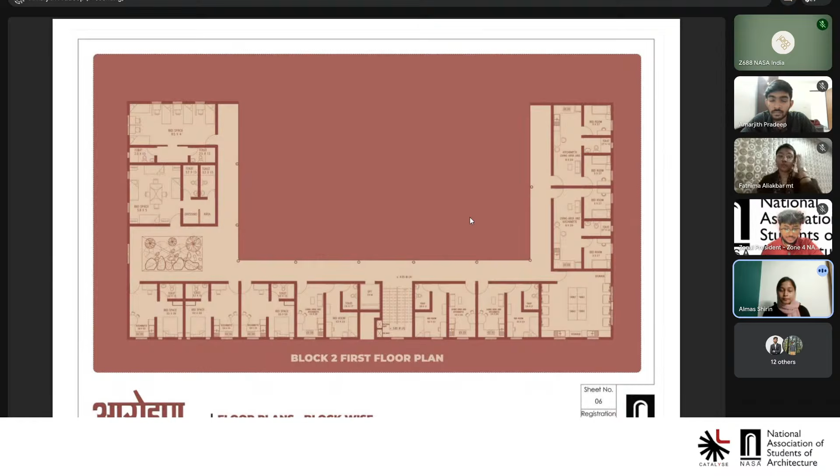So block 2 consists of the 1 BHK apartments and 2 BHK, and some co-sharing spaces as well. Next page, Amar.

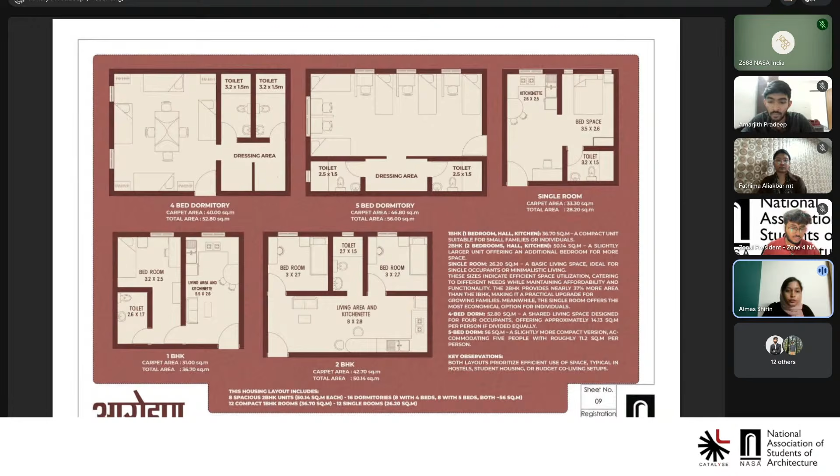So this is the plan of 4 bed dormitory, 5 bed dormitory, and single room, 1 BHK, 2 BHKs. As you can see, the dressing areas are planned in such a way that one is not disturbed by the other.

We also added some spaces like co-working spaces, gymnasium, laundry spaces, and cafe, which improves interaction. Co-working spaces help one to get to know each other and get an interaction atmosphere, and cafes and semi-reading areas in between the planning make it more lively. We also added a gymnasium for physical activities, etc.

We did a part on cost estimation and material specification of the project, where the approximate cost comes at around 10 crore, approximately 1800 to 2000 per square meter, with an ROI in 8 to 10 years. The materials we use are compressed stabilized earth blocks (CSEB) and fly ash bricks. Fly ash brick is the most prominent material we used in this design. We also incorporated terracotta jali, clay tiles, recycled wood, and recycled glass to reduce the cost of the project.

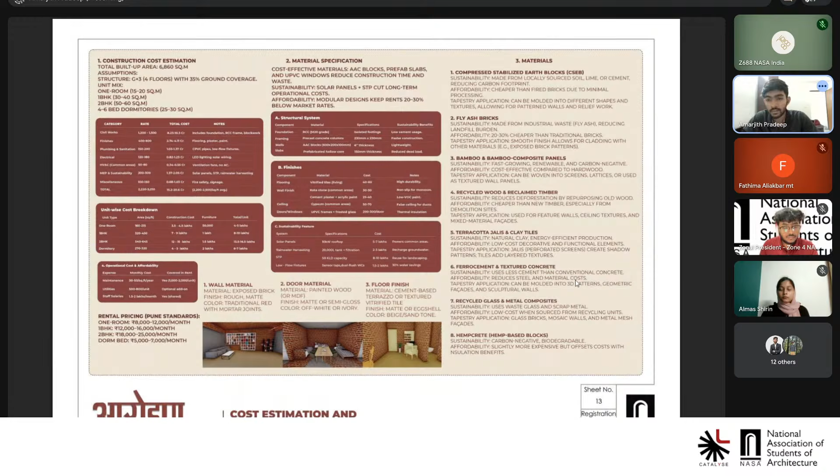These are the renders of the interior spaces, rooms, and the dormitories. And I hand over to Almas for the conclusion.

It was, of course, difficult for all of us to manage our academic responsibilities along with this Hudco journey, but still we managed to get things done with the help of our faculties and friends, and the teamwork always helps in a good way, I guess. Thank you.

That was a great presentation. Since you mentioned there are some drawbacks while you were working on this trophy, what were the strongest aspects for your team when working together? What would be that one thing that gave you a major learning or takeaway from participating in this trophy?